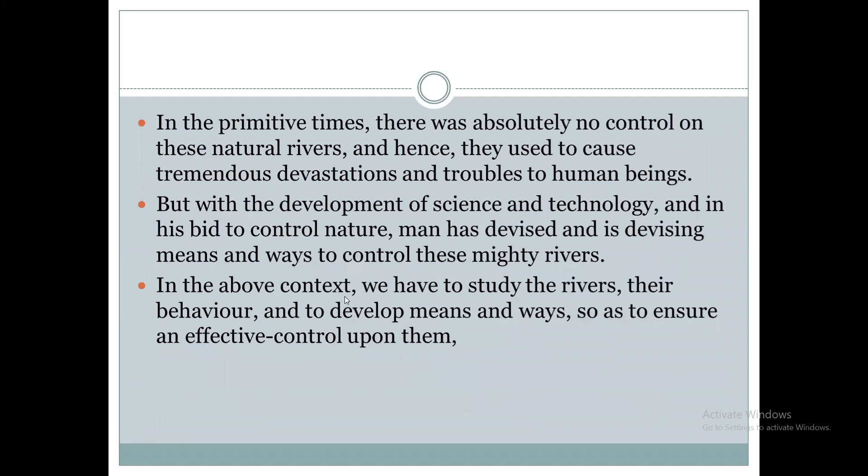The importance of these rivers we have seen. Then types of rivers and their characteristics. The classification of rivers is done on the basis of topography of the river basin. It is classified into three types: rivers in hills, that is rivers in upper reaches; rivers in alluvial plains, known as rivers in flood plains, that is rivers in lower reaches; and tidal rivers.

Rivers in hills. Rivers in hills or rivers in upper reaches are the rivers which take off from the mountainous region or hilly area, from which the river flows from the mountainous region to the plain region. They flow through the hilly regions before traversing the plains. These upper reaches of the rivers are termed rivers in hills. Rivers flowing from mountainous regions to plain regions are called rivers in hills, that is rivers in upper reaches.

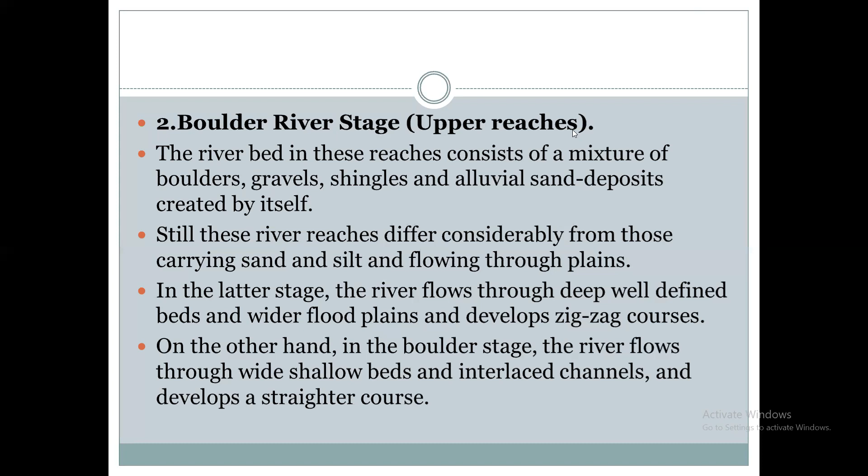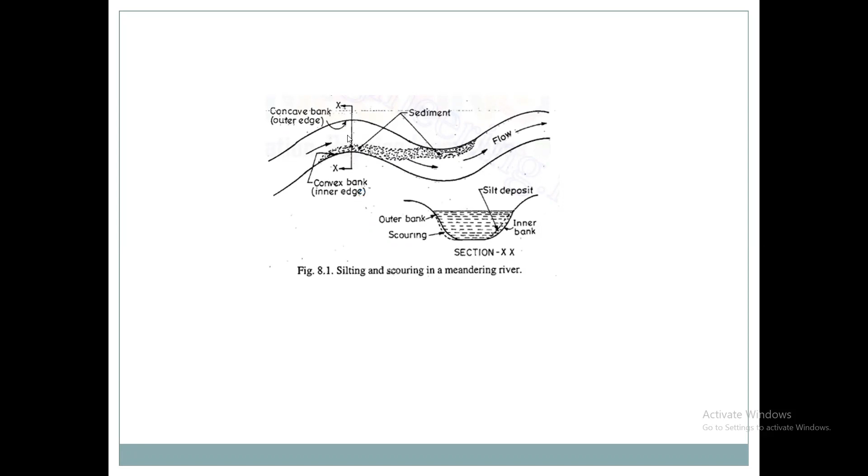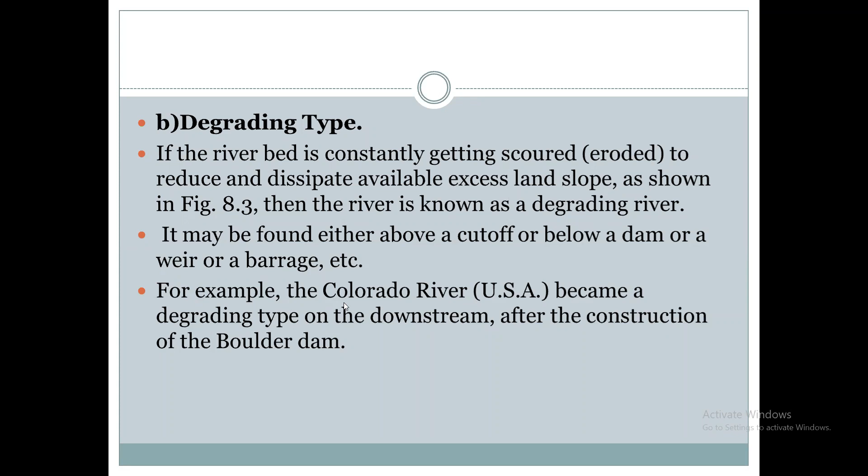So this degrading type river may be found either above the cutoff or below the dam, weir or barrage. An example of a degrading type river is the Colorado River in the USA. After construction of the Boulder Dam, this degrading type river was formed. This is an example of degrading type rivers.

The stable type rivers are those in which no silting and no scouring will occur. In this, the river does not change its alignment, slope and its regime significantly. So it remains stable. Therefore, it is called stable river.

So in this, silting or scouring will not occur. Braided rivers: in this, the river flows in two or more channels around alluvial islands. Around the alluvial islands, the flow of the water will occur. The river flows in two or more channels. The flow will occur in two or more channels around the alluvial islands.

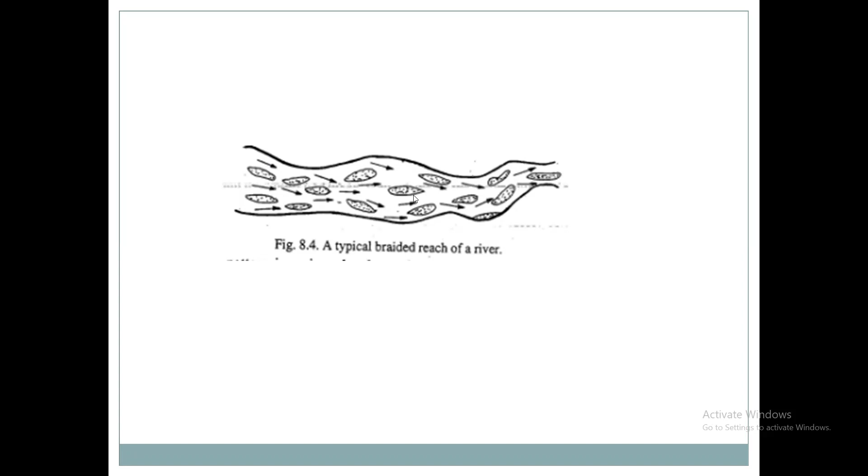So when these islands are created, the braided pattern river develops after local deposition of the coarser material. After deposition of the coarser material in the river bed, the alluvial islands are formed. This coarser material cannot be transported during the flow of the water, so they form as alluvial islands.

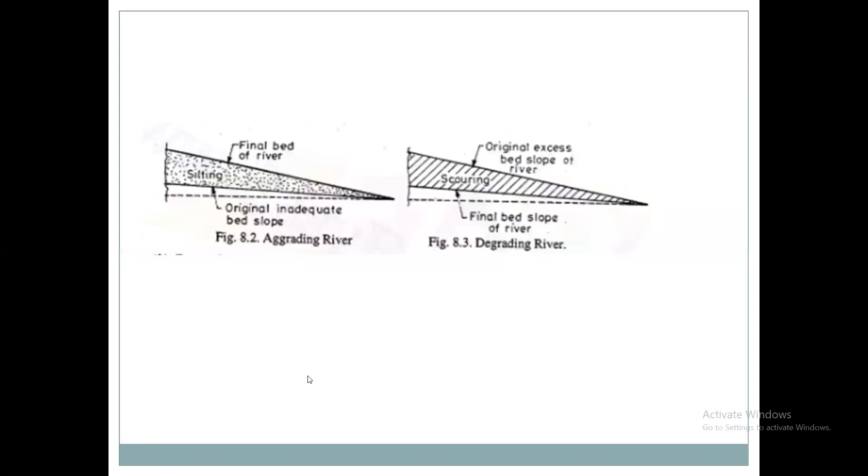So islands are formed which consist of coarse and fine material due to deposition of the coarser material in the river bed. These alluvial islands are formed, and the water will flow in two or more channels. Some of the braided rivers are stable type rivers, aggrading type and degrading type rivers. Any difficulty in this? Please ask.

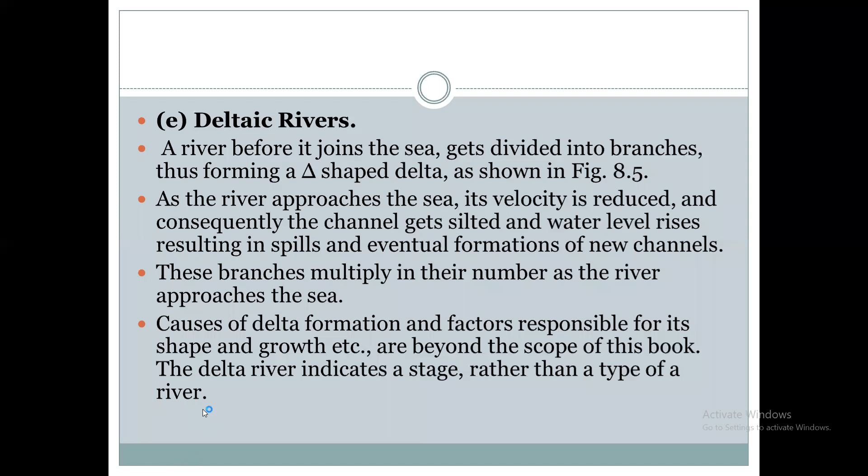So while joining the sea, these branches multiply in number as the river approaches the sea. This causes delta formation. Therefore, this type of rivers are called deltaic rivers. And the last one, tidal rivers. So tail reaches of the rivers.

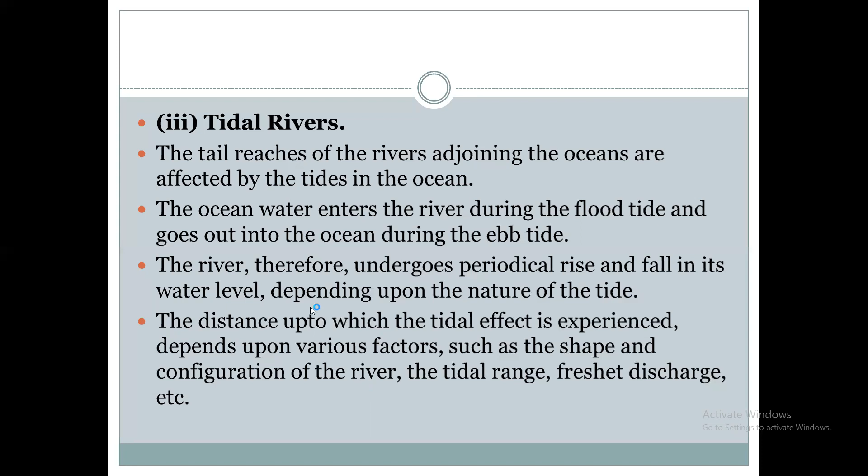These are the tidal rivers. During flood tide the water will enter into the river, and during ebb tide it will go out into the ocean. Therefore, these are called tidal rivers. Next, classification of rivers on the basis of flood hydrographs.

Classification of rivers on the basis of flood hydrographs. They are classified into two types: flashy rivers and virgin rivers. They are classified on the basis of the nature of their flood hydrograph, the flood hydrograph of the river. Based on that, these rivers are classified.

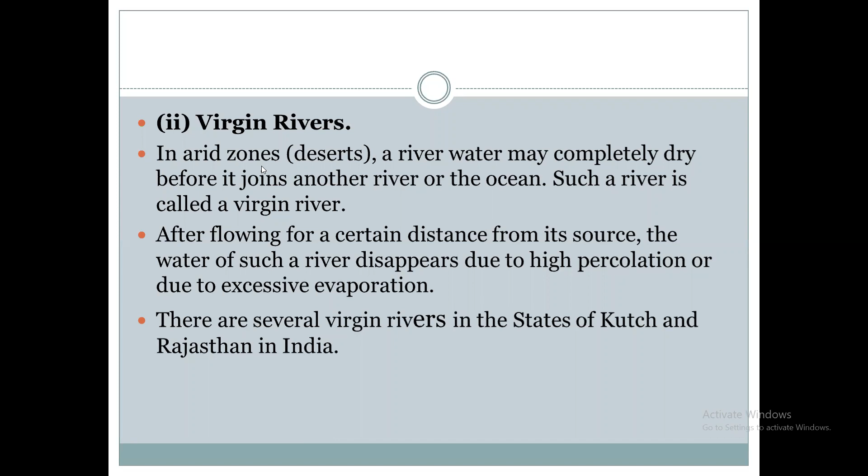So this is a classification based on flood hydrograph: flashy rivers and virgin rivers, and the difference between flashy rivers and virgin rivers.

If there is any difficulty, ask. You can unmute yourself and you can ask. Is there any problem in this? Or you can ask in the chat box.

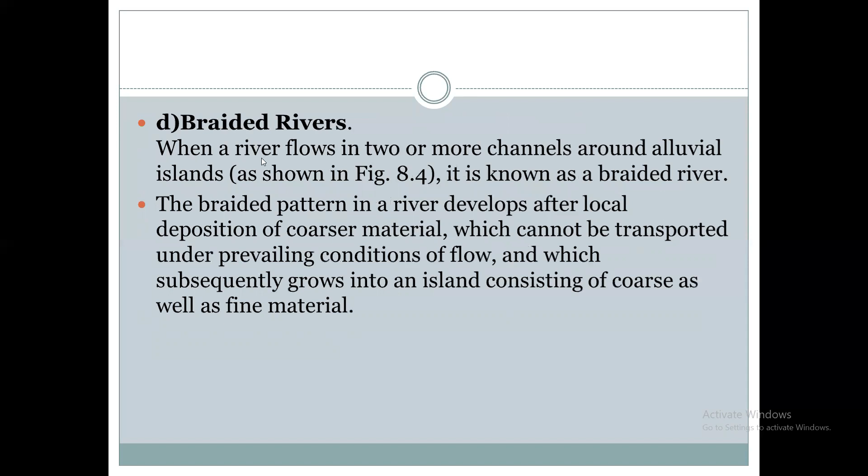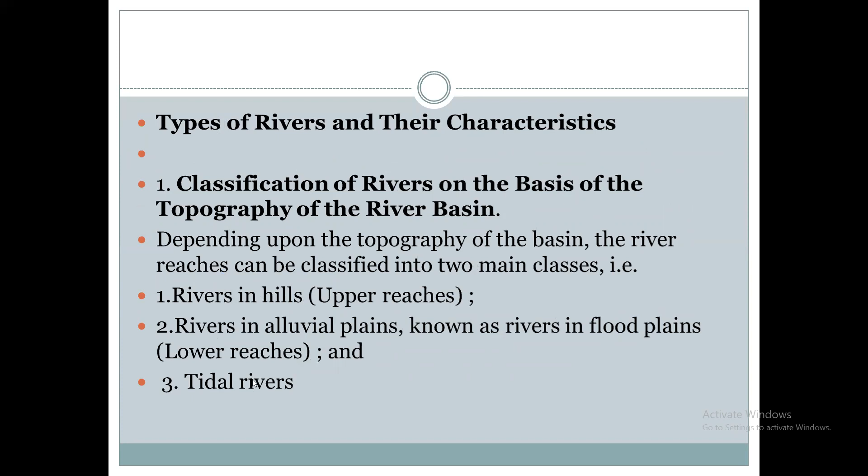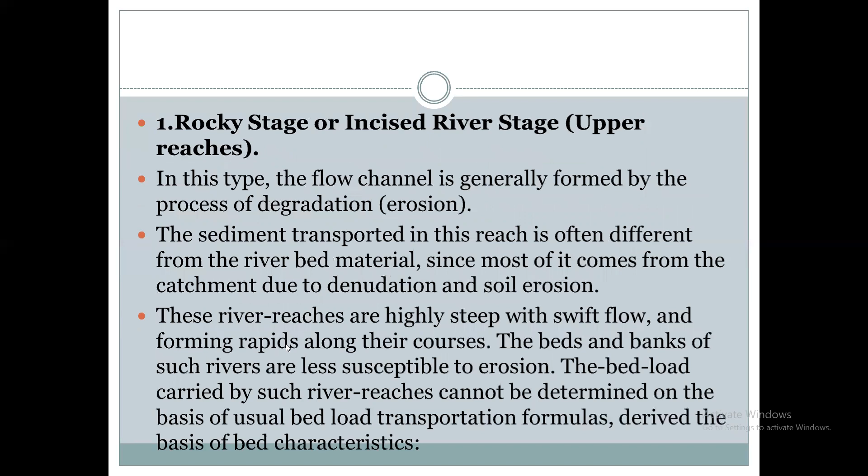What classification have we seen? First, classification of the rivers on the basis of topography of the river basin. In that there are three types: rivers in hills, rivers in alluvial plains, and tidal rivers. Rivers in hills have two types: incised or rocky river stage and boulder river stage. In rivers in alluvial flood plains, there are 5 types: aggrading type, degrading type, stable type, braided type, and deltaic type.